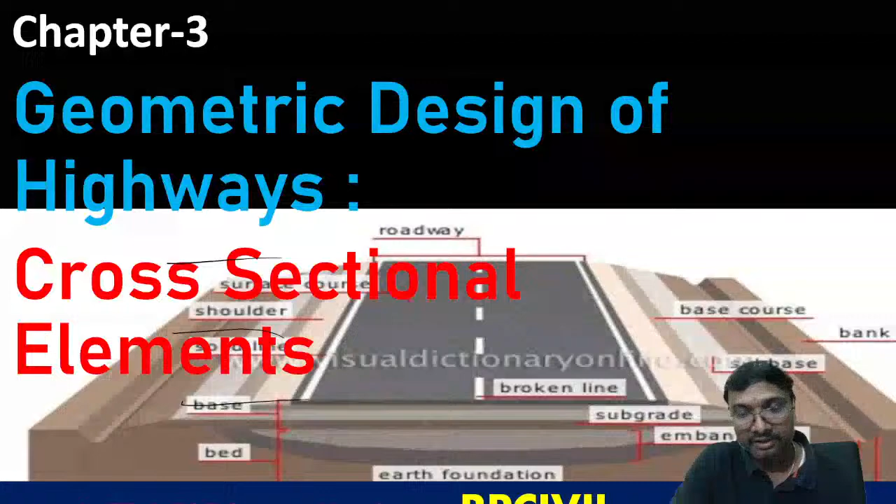Now this quick revision of this highway engineering part 1 now. The cross sectional elements, if you just observe, these are all the things over now, isn't it? These are all over or not? Isn't it? These are all over. You can say that carriageway over, formation width over, right? A few points regarding the formation width we discussed, right?

Everything. Next after that, what is it you can say? This formation width parts are continued, you can say, right? This cutting slopes, width of this median, as now width of this median we are having, cycle track, right? Properties of this bus bay, right? So these are laybys, right? Everything is over now.

The width of this footpath gets over, right? Next, cycle track is also over now. The maximum distance between these two gets over, right? So in today's class, what are we doing? This YouTube live is a quick revision of highway engineering part 3.

So here, how many points are over? 27 points are over now. Now if you observe, this is your 28th point we'll be seeing now.

So here, what are the other cross-sectional elements we'll be having? Tell me. What are the other specifications we'll be having? Any other cross-sectional elements? Anybody? Can you just guess some cross-sectional element? Okay.

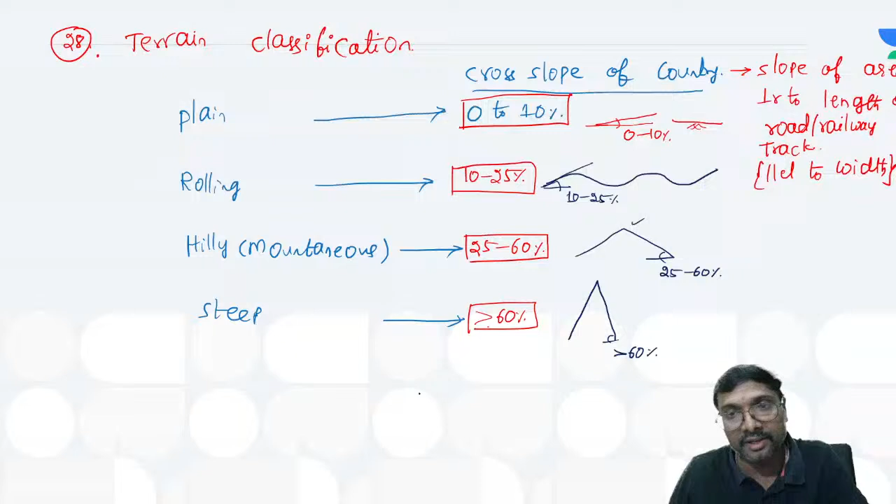Very dangerous hills, right? So that is why in most situations we don't go for construction of roads in steep terrain. Is that clear?

Did I give the normal value of land width, 30 to 60 meters, 45 meters? Okay, I have given these values. Is this point clear to everyone? So shall I move to the next one?

So the 29th point, if you just observe, is friction. What is the value of lateral friction? Lateral friction is 0.15. And what is the longitudinal friction? Tell me.

The longitudinal friction will be varying from 0.35 to 0.4, right? 0.35 to 0.4. Got it now? Note this and tell me. Are these values clear? Done.

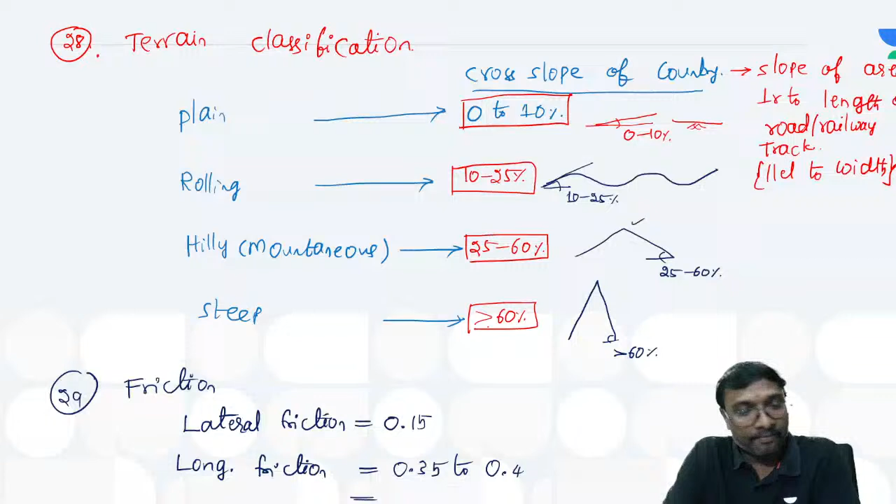So this is your first slide, the 29th point. Then the 30th point, camber. What is the main purpose of camber? Tell me. The main purpose of camber is to take care of drainage only.

So what are the symbols we use to represent camber? C, or 1 by n, or you can say X percentage, right? These are the three ways we'll be representing it.

Now, how to convert that? The main purpose is drainage only, to take care of the water. And it depends upon the type, that C maximum. What is that C maximum?

Camber, also called cross slope, is the slope in the width direction only. If you are providing the road like this, it is okay. Or if you are providing the road in the width direction like this, it is okay. These two are okay, but this one is not okay.

Why? Whenever water comes onto the road, who will take off this water easily? The first one will take it off easily, or only the second one? Actually the second and third category only will take off this water, because it is the slope in the width direction of the road.

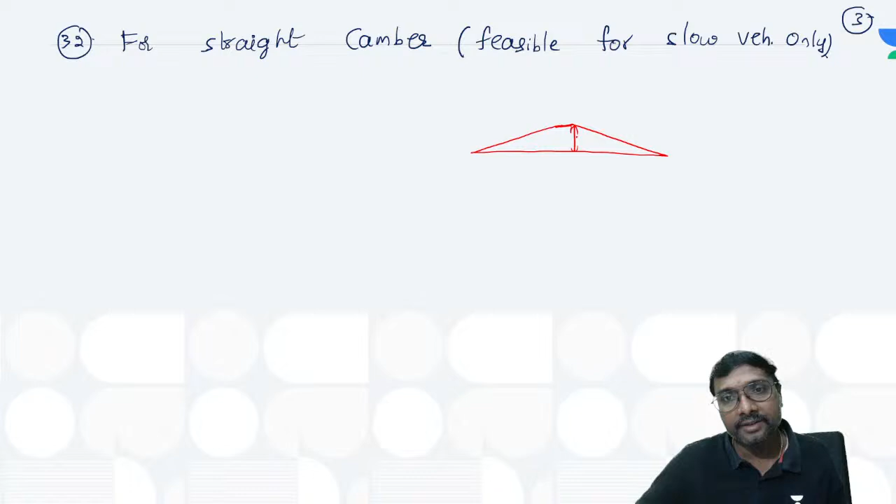This is your central rise, capital Y. Central rise means it is at which distance from this left side? From this left side it is at W by 2, and from this right side also it is at W by 2. But do you need only the rise at this center, or is a rise at every point also required for construction? Rise at every point is also required for construction.

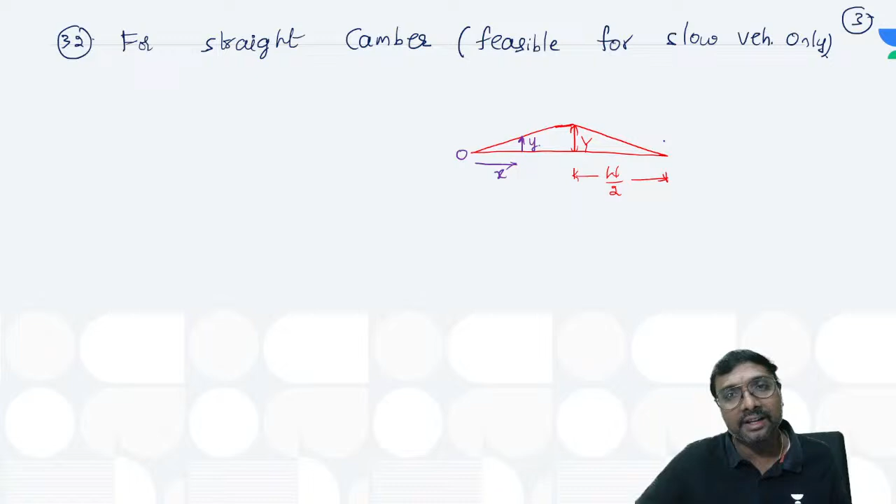From this edge, if you are taking this x distance, this is your rise y. How can you calculate that? This is your camber equal to 1 by n, equal to capital Y by W by 2. Opposite side by adjacent side is your tan theta, equal to capital Y by W by 2, equal to small y by small x also. So what is that? Rise at x distance from the edge.

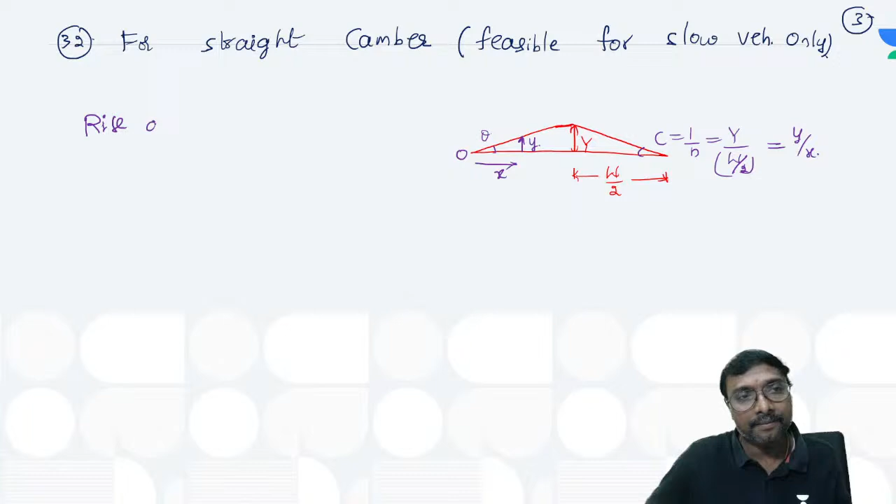Rise at this x distance from this edge, what is that? Tell me: y equal to x by n. Y equal to x by n, you can say. So what are the values of this x? We have to substitute 0 lesser than or equal to x lesser than or equal to W by 2; only then it is applicable. Because it is applicable for this left half portion, and for the right half portion also you have to apply the same.

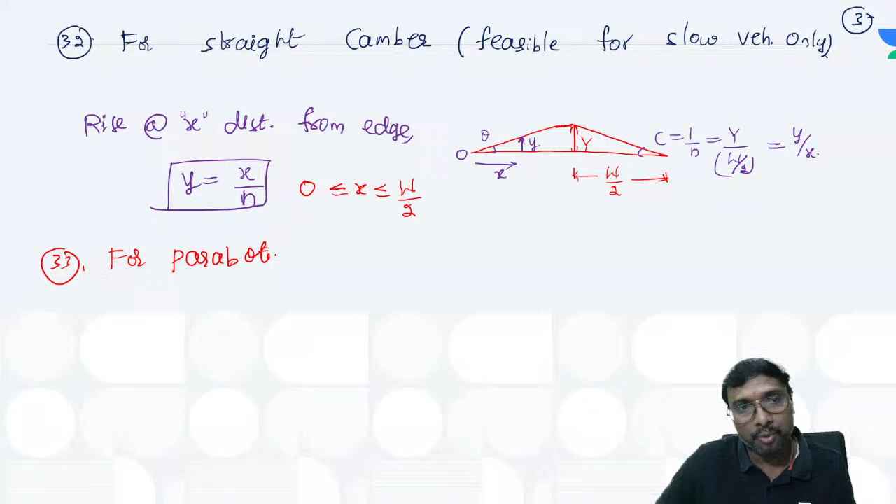Whenever you consider this parabolic camber, tell me, a parabolic camber is feasible only for which one? That is feasible only for fast vehicles. It is not feasible for slow vehicles, because slow vehicles are traveling at the edges. At the edges, the parabola will be steeper. At the center, it is flatter. So that's why.

Now, if you consider this parabolic camber, for applying this parabolic equation, which one do we need to consider as the reference? Here at the edges it is steeper, and at the center it is flatter, you can observe that. Now we take this crown as the reference point, the origin. With respect to the crown, at this x distance, this is your y distance, the fall we will be calculating. This is your W by 2. We can apply it only for this left half, and for the right half also it will be in a similar manner.

So what can you say about the fall at x distance from the crown, with respect to the crown? Y will be equal to 2 by nW into x square. Y equal to 2 by nW into x square.

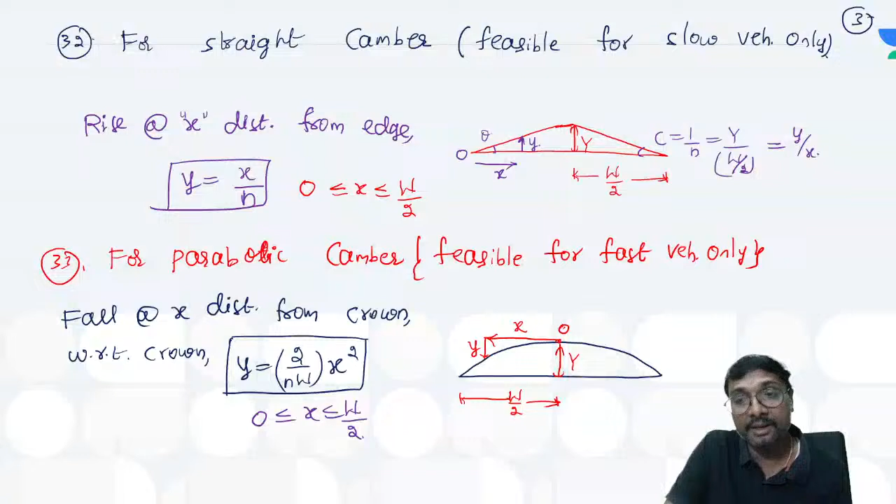2 by nW into x square. What are the limits of this? 0 lesser than or equal to x lesser than or equal to W by 2 only. These are the limits. Now shall I move on to the next? This is the 33rd one.

Next, the 34th one: combined camber. So why are we going for this combined camber? Because in India we are having mixed traffic conditions. Whenever we are having this mixed traffic condition, both fast vehicles as well as slow vehicles must be traveling comfortably. So this is feasible for both.

At the center, fast vehicles are traveling, so at the center you provide the shape feasible for fast vehicles, the parabola. At the edges, slow vehicles are generally traveling, so for the edges you provide the shape comfortable for slow vehicles, that is the straight line. So what is a combined camber? It is suitable for both.

Suitable or feasible, okay? Feasible for both the vehicles or suitable for both the vehicles, you can say. And now whenever you are considering this combined camber, practically you will find this, right? You cannot differentiate that much, but okay, it will be only there.

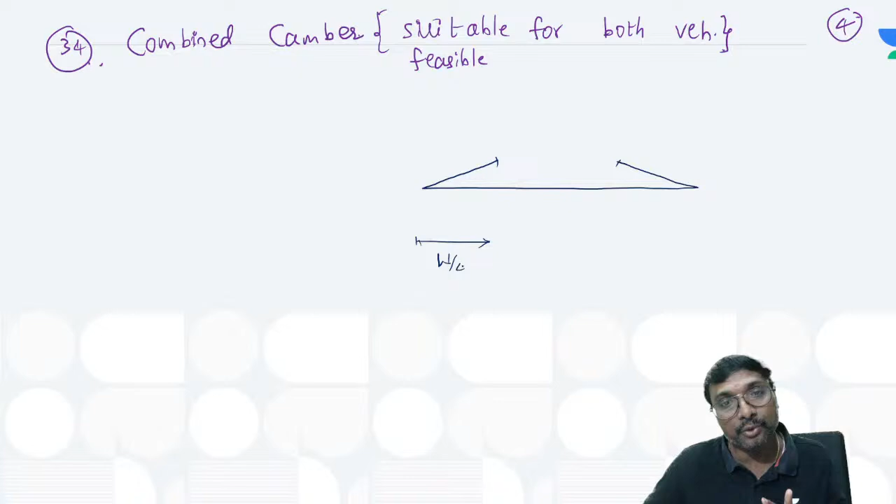This is your straight line portion, up to which distance we have to provide? Half length straight line portion and a half length parabolic portion we have to provide, right? Half length means, right and left side together it is half of this width of the road. Means the left side it is W/4 and the right side it is also W/4, right?

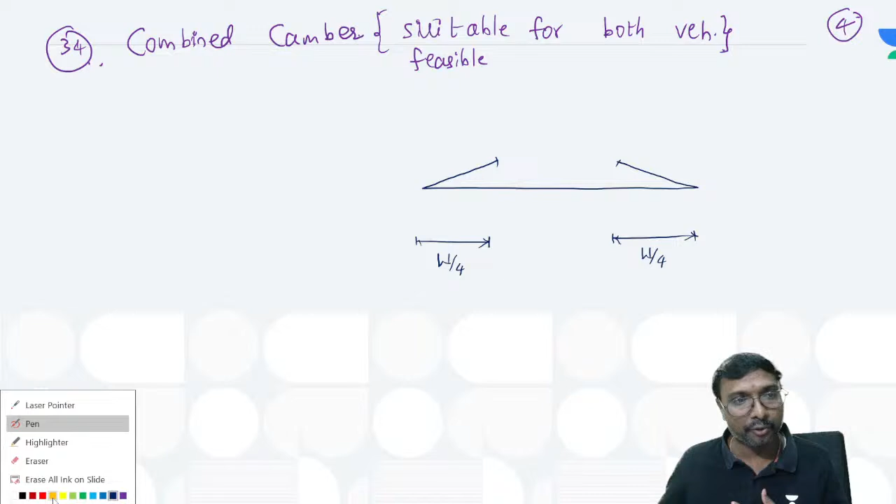Now, at the center, what will be provided? You can say that a parabola tangential to this straight line will be provided, right? So for how much portion this center one is provided, you consider that is your W/2.

Now, how can you apply this? How can you calculate this? So here for this straight portion, we'll be calculating from here only. At this x distance, this is your rise y you are having.

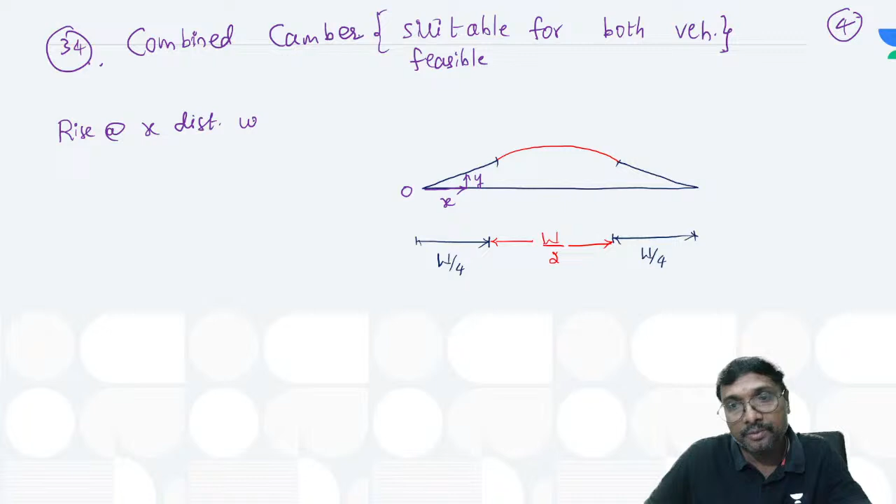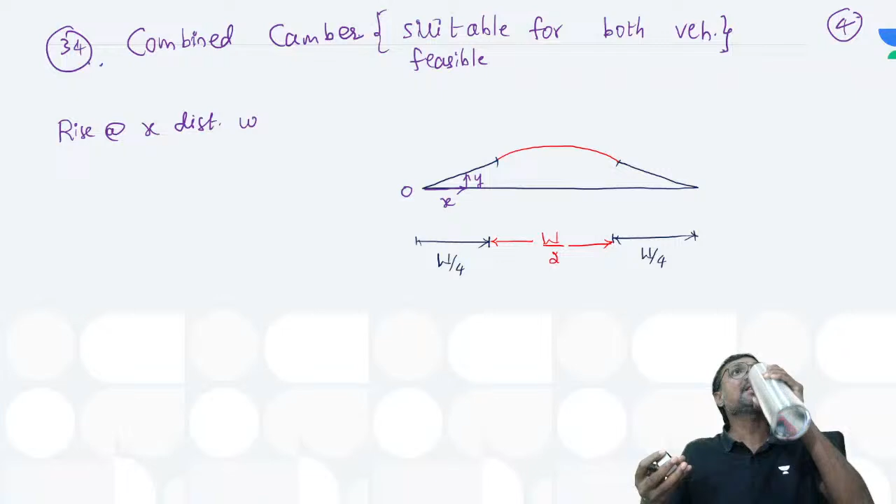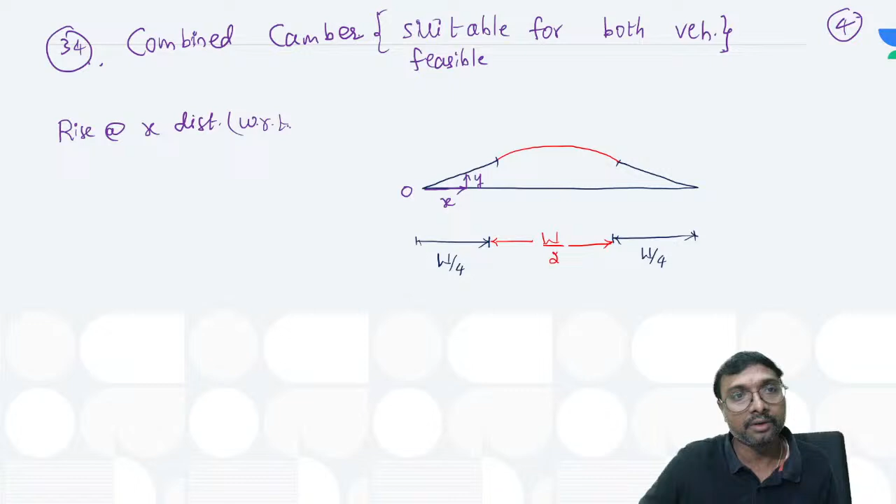Rise at x distance with respect to or from the edge. What is that rise you can say, at this x distance? That is y equal to x by n only, same formula only.

But here x will be varying from which one? 0 to W/4 only, is it going up to W/2? Can we apply this straight line condition up to W/2, or W/4 only? W/4 only we can apply, because we don't provide the straight line from edge to the center. We provide edge to this W/4 distance only.

Now, so what is it for this itself? Under this point only we have to write this one: up to W/4 only, because the straight line portion is present up to W/4 only.

Now, what is that for the parabolic portion? How to take it? This crown, you take it with respect to this crown, at this x distance we will be calculating this y.

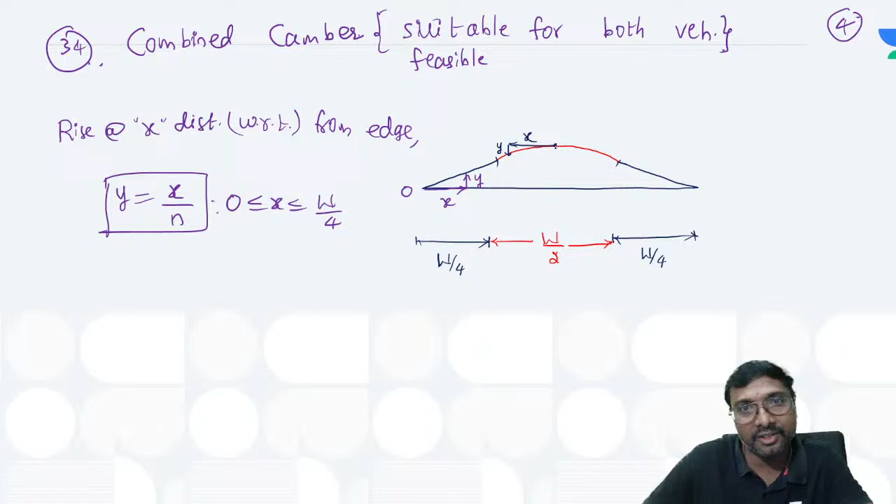So now if you just observe, this is your central rise capital Y. And from here to the end of the parabolic portion, the distance is W/4. So this right side is also W/4. Left side if you calculate, and right side also the same values will be there, with respect to the crown. For left side W/4, whatever values you are having, for right side W/4 also we should have the same values.

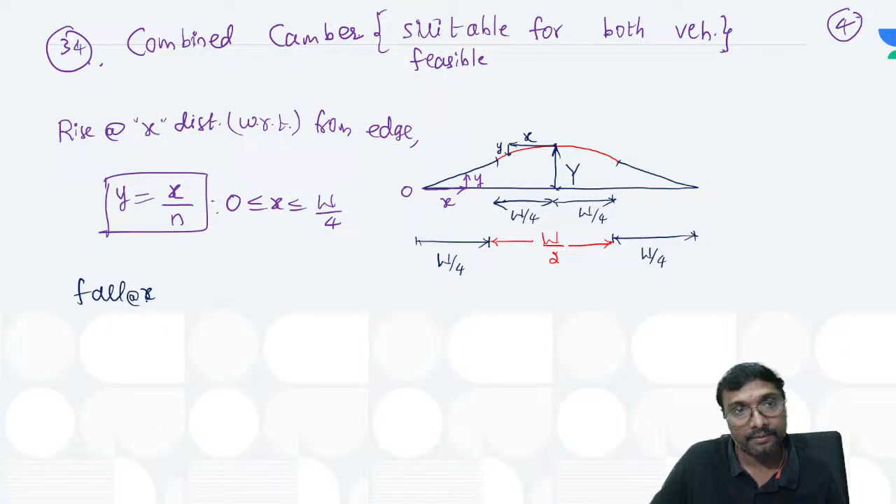So what is it? Fall at x distance, symmetric, with respect to the crown. What is that? y equal to, there it was for full parabola, 2 by nw, because W/2 portion we considered. So if it is W/4 portion only we have considered, that is your 4 by nw into x square. So that x value will be changing from 0 less than or equal to x less than or equal to W/4. 4 by nw will come into picture.

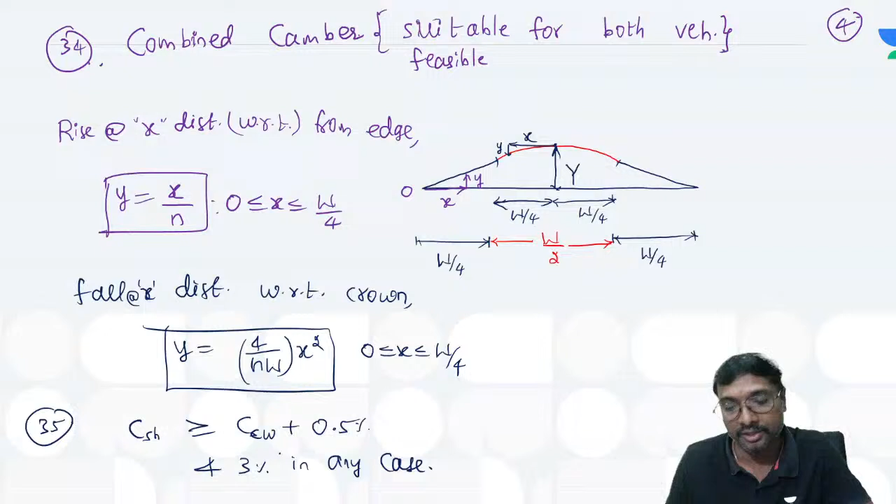Now suppose if you are providing this shoulder camber or cross slope of the shoulder as 2 plus 0.5 equals 2.5. So are we allowed to provide 2.5, or do we have to provide this 3% minimum? We have to provide this 3% minimum, na? So means minimum 0.5% extra, but if it comes to be lesser than 3, make it 3. That's it. Understood?

Now in case of this verges, what is the camber? Camber of this verges, how much we have to provide? That camber of verges will be taken from 3 to 5%, you can say, right? Yes, even for 1.7 also, right? 1.7 plus 0.5, how much it comes to be? 2.3 it will come. But are you allowed to provide 2.3? No, we have to provide 3% minimum, right?

Very good. Now, how can you check? What are the instruments we'll be using for checking? That the camber provided will be checked using what instruments? Using this camber templates.

Using camber templates or which one? This camber boards, you can say, is na? Using this camber templates or this camber boards, you can say, right?

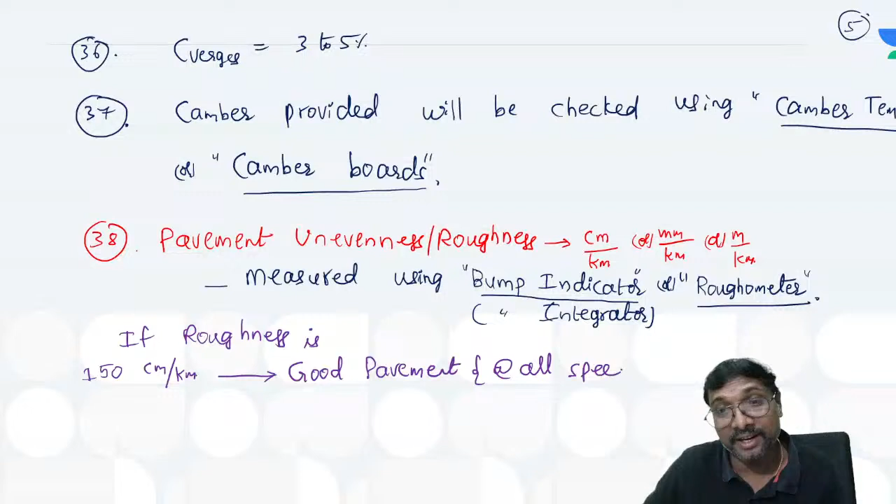At all speeds, it will be acting like a good pavement only. Means you can travel comfortably in that with any speed. If you are traveling with 100 kmph, 200 kmph, or 10 kmph also, you will get the same comfort level. You don't feel that somebody is pulling you back, because that roughness is very lesser.

Next, suppose this is 250 centimeters per kilometer. What is that pavement you can say? This is called your satisfactory pavement. Even at 100 kmph it is acting like satisfactory only. If you are traveling with more than 100, unsatisfactory. If it is lesser than 100, then you can feel more satisfactory. Up to 100 it is satisfactory, more than 100 non-satisfactory.

Now if it is 320 centimeters per kilometer, that is your poor pavement, absolutely. It is acting like a poor pavement even at low speeds like 55 kilometers per hour also.

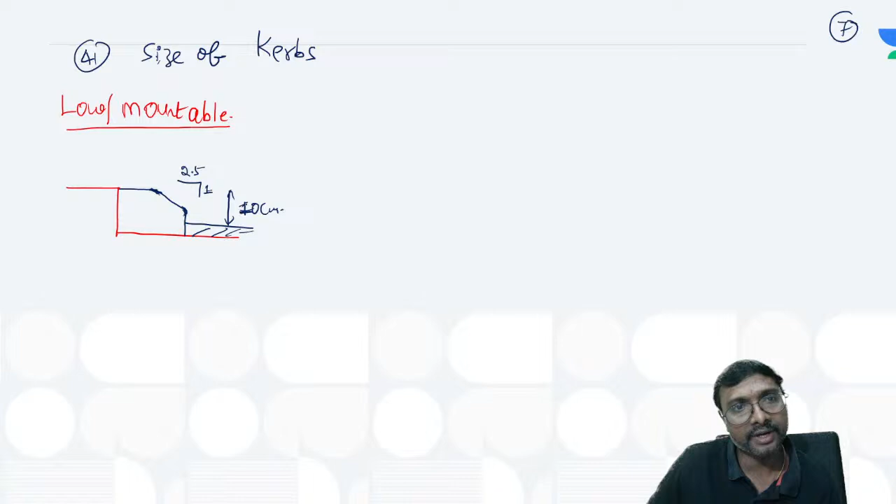So here, instead of sharp, it is better to provide a rounded one. Now what is the slope? 2.5 horizontal to 1 vertical slope for the sloped portion. From the top of the kerb to the top of the carriageway, a 10 centimeter gap is maintained. The width of this kerb is 25 centimeter, and the total height of this kerb will be 20 centimeter.

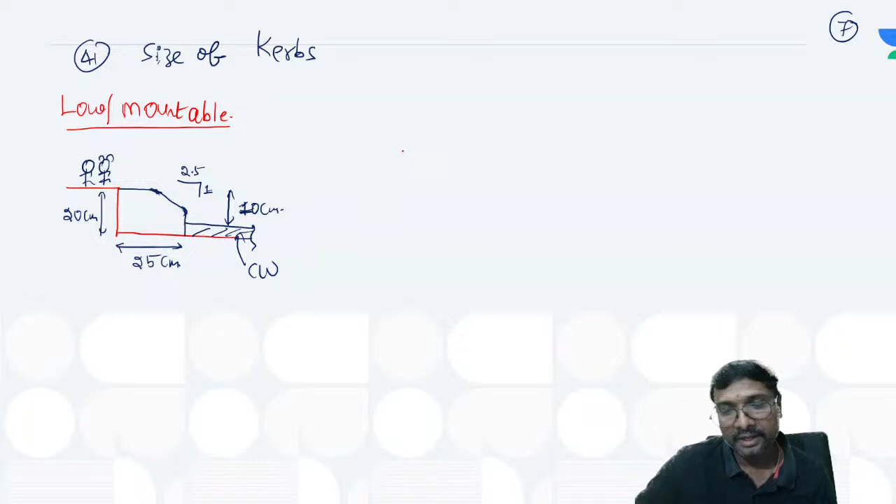So this is where small children are walking, the footpath. This is your footpath, this is your carriageway, that is your kerb. From the top of the carriageway to the top of the kerb, it is 10 centimeter. Low or mountable type of kerb. Now, the next one: semi barrier type.

So what is that semi barrier? Here if you just observe, will the width be higher or the height be higher? Here width is higher than the height, right? Now if you consider this semi barrier type, it is a little reverse. Height will be higher than the width if you just observe, right?

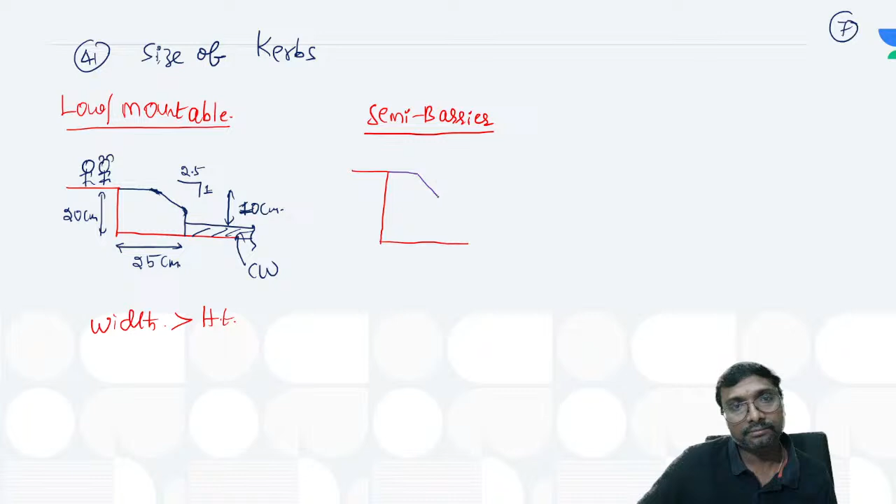So here the width is 15 centimeters, and the total height is 27.5 centimeters. And the height from the top of the carriageway to the top of the curb is given as 15 centimeters if you just observe. And the slope you consider is 1:1, right?

Here if you just observe, this is your 2 centimeter radius fillet. That is your 2 centimeter radius fillet, right? They are walking on this footpath. Now, what is another one? Barrier type.

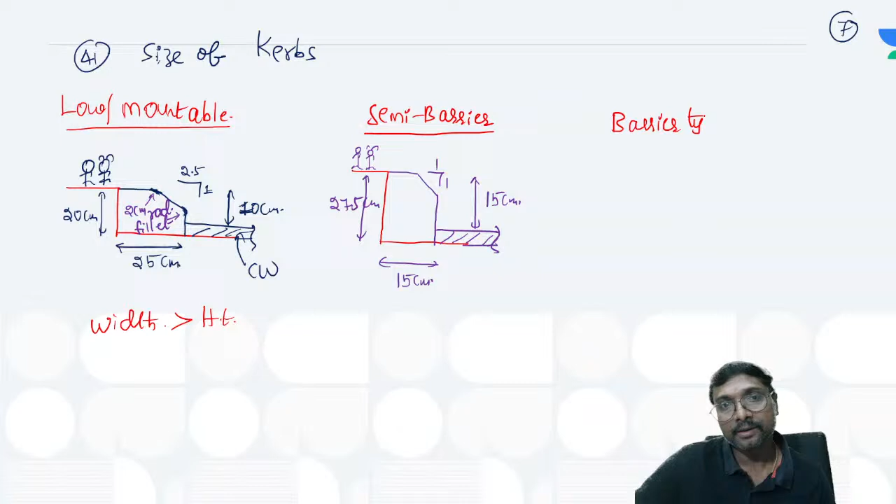In this barrier type also, height will be greater than the width. Height is greater than the width in case of the semi barrier. Now in case of this barrier type also, height will be higher than the width if you just observe. Same here also, we have to maintain this curved one, the same 2 centimeter radius fillet.

So here, if you just observe, the slope is 1:4. And from the top of the carriageway to the top of the curb, it will be 20 centimeters. And the width, there it was 15, here it is 16.5. And the total height, there it was 27.5, here it is 32.5 centimeters if you just observe.

Same 2 centimeter radius fillet, if you just observe. The radius of this fillet will be 2 centimeters. Here small children will be walking, you can say. So this mostly completes the cross sectional elements.

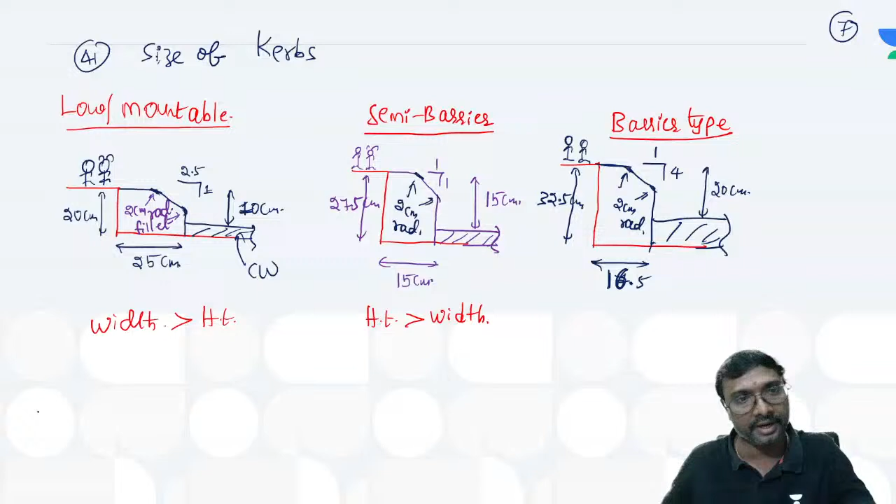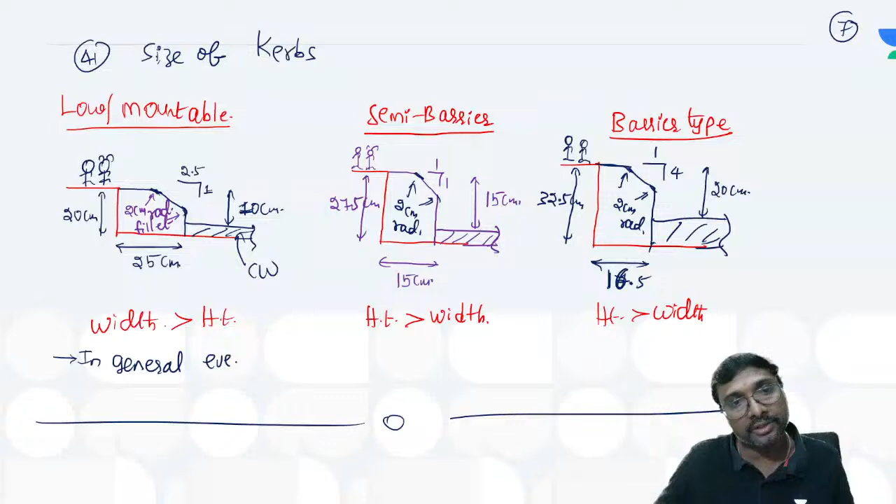Specific applications, if you want to have them? I'm not writing the specific applications here, but okay, if you want, I'll write. Height is greater than the width. So the low or mountable type is in general, everywhere. In general means if nothing is mentioned, we have to use this one only. In general everywhere we have to use it.

Yes, tell me, Pravalika. Now the second one, the barrier type, what can you say? This is for considerable pedestrian traffic footpath. Whenever a considerable pedestrian traffic footpath is there.

What you'll ask? Don't ask their names. Okay, I don't know.

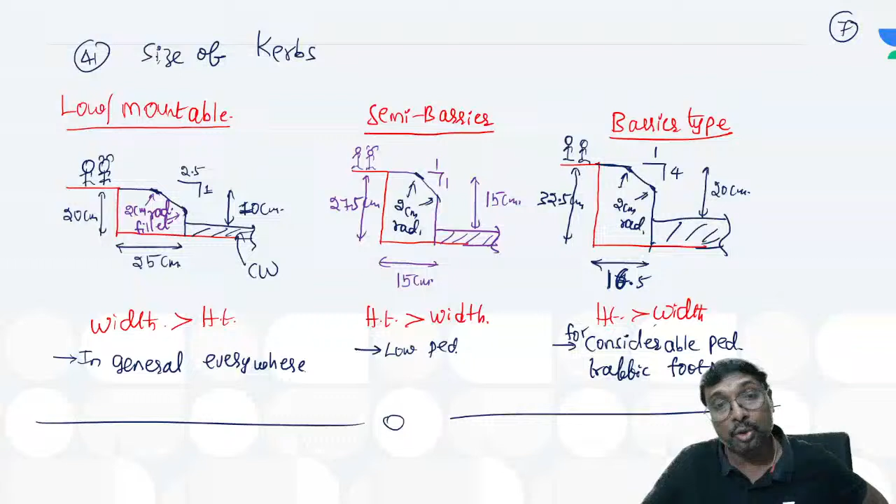Where a considerable pedestrian traffic footpath is there, you have to provide this barrier type. So when do we go for the semi barrier? Low pedestrian traffic footpath. These two are in which areas? These two are in the built up areas, right?